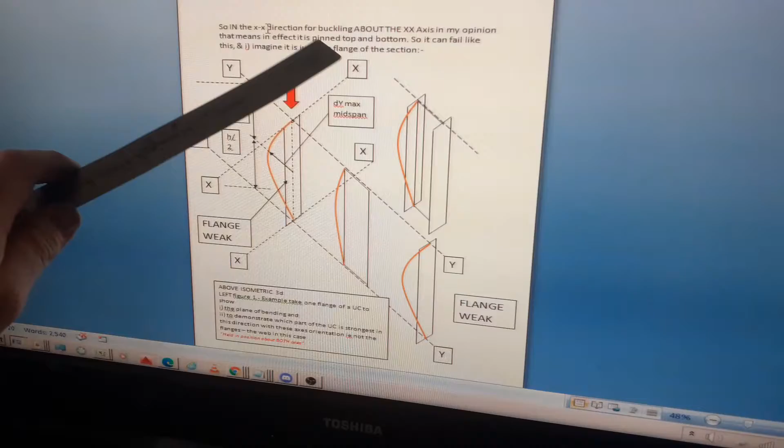So it's effectively held in direction in the XX axis. So in the XX direction, for buckling about the XX axis, in my opinion, that means it is pinned top and bottom. So it can fail like this.

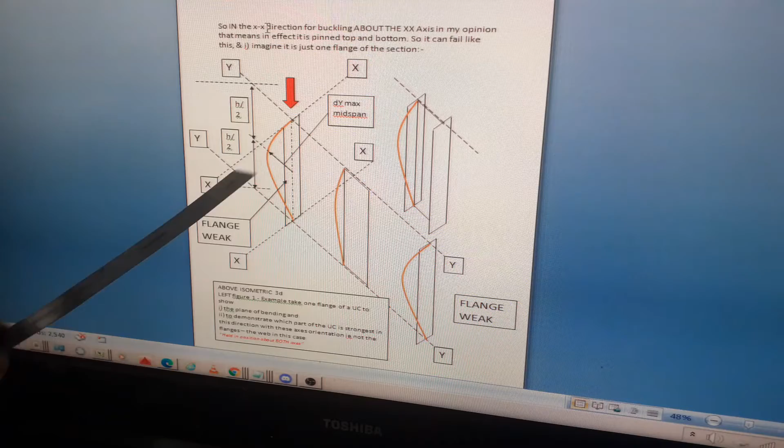Here's a little diagram. We're looking at XX, which I've drawn like that. This is the beam. I've drawn it like an I-beam, but it's actually more like an H, isn't it? 203 by 203 times 52.

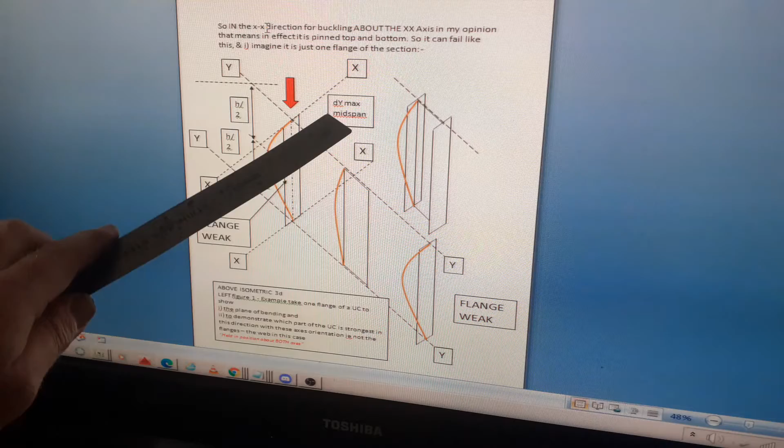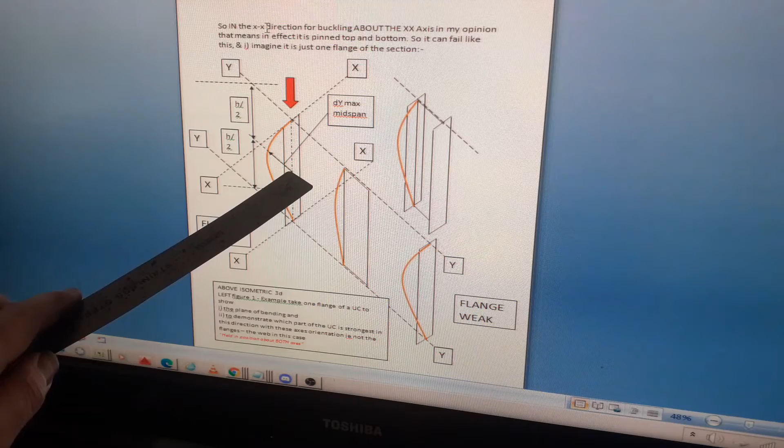It will buckle about this axis. As I've done another diagram below, if it buckles about the XX axis, I found it easier to think of it as all the deflection taking place on the y axis, at 90 degrees to the XX axis. Just think of it like that. So if it buckles about XX, that means it deflects about y, at 90 degrees. So like this.

So I can do it with a ruler, and here's a chance to look at how good things are at resisting buckling, because this is a column, right? You've got flange, web, flange, and I've separated those into three parts. We're talking about buckling against the XX axis.

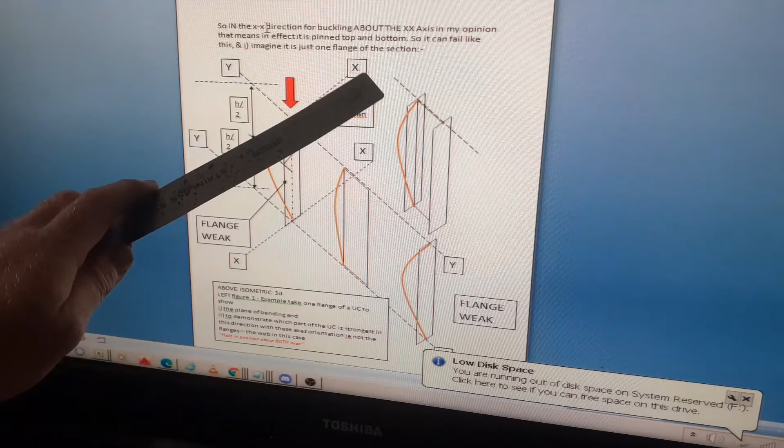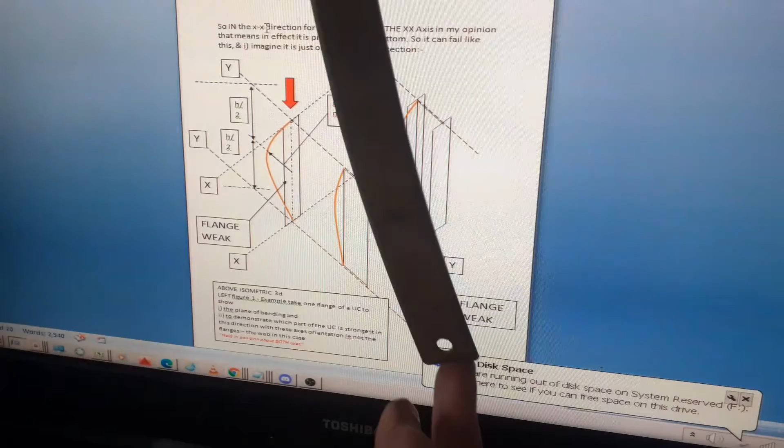If you look at the flanges, they are parallel to the axis of buckling, so that means when you do this, it's easy, it's going to buckle. It's weak because BD cubed about that axis is the least, so it has very low moment of inertia about that axis.

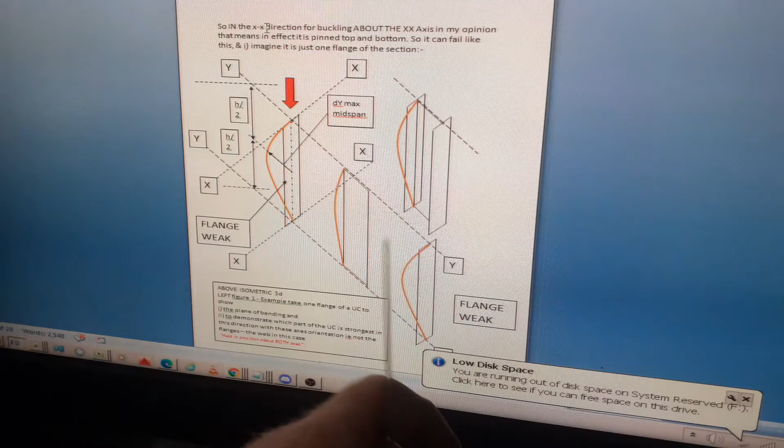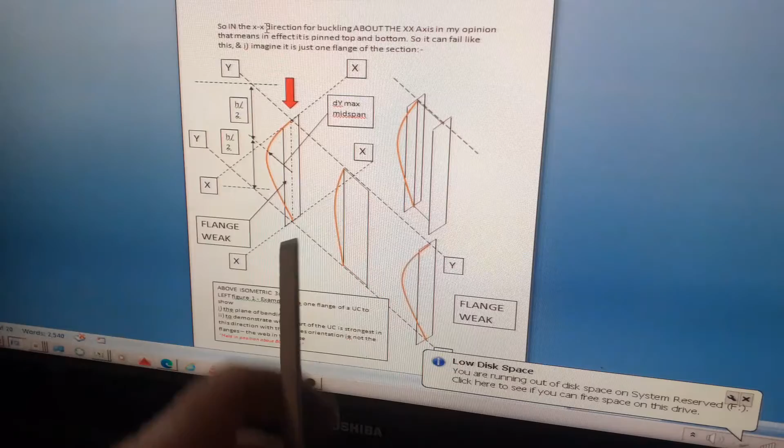So it just bends. The flanges for this section, the way it's orientated about XX, are going to be weak. The thing that's going to do all the work is the x-axis, because if you turn this at 90 degrees, I try and buckle it and I can't. It won't buckle about the other direction, because the BD cubed is much bigger.

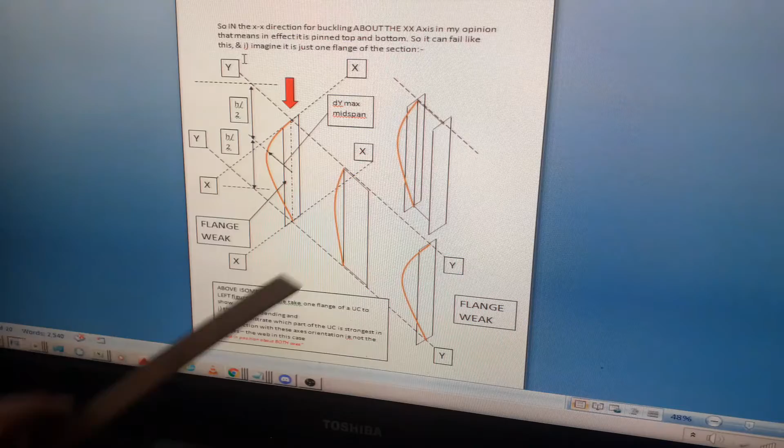The other thing to think about was the maximum deflection, which if everything's symmetrical, should take place at h/2. Here's the axial load; the maximum deflection will take place at midspan. So the above isometric 3D, that's an example

of how the column will buckle, to show the orientation of when it says buckling about XX, that means maximum deflection along the y axis. So the plane of the bending, that's what I'm talking about, the planes of the bending.

And to demonstrate which part of the UC is strongest, the flanges are weak about XX, but the web is very strong about XX.

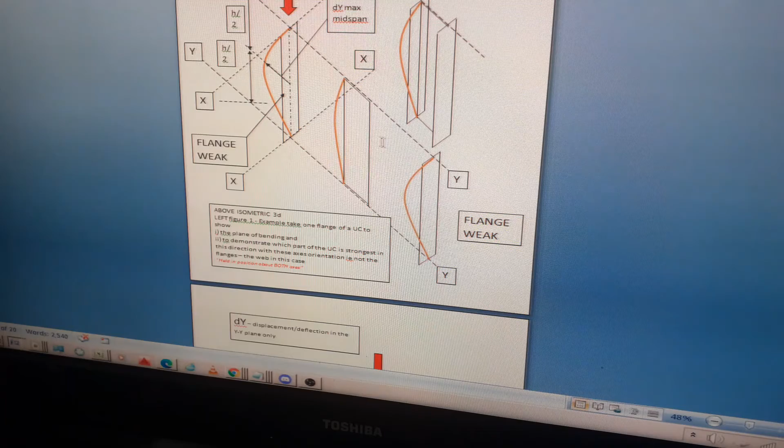So then I've done here, so there's that diagram, that's an isometric, and then I've done this diagram. This is dy, displacement deflection in the Y-Y plane. So I've done a cross section basically. All I was trying to show is again how it buckles.

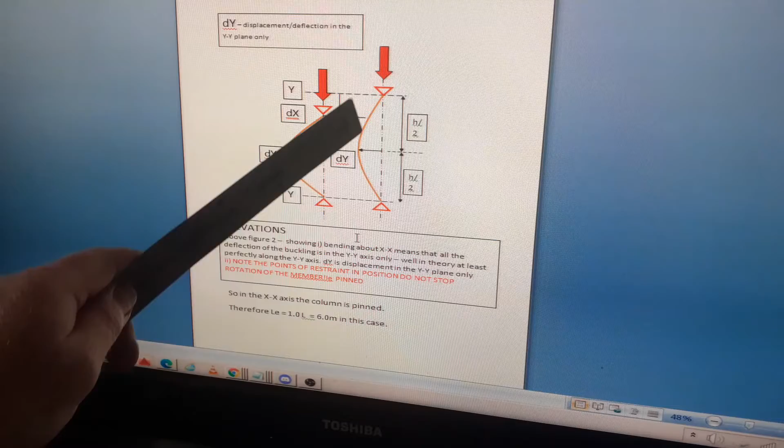So basically this is dy, along the x-axis coming in out of the page. Dy is the maximum deflection. So go back to the ruler again. It just bends like this, with the maximum deflection of dy at h/2.

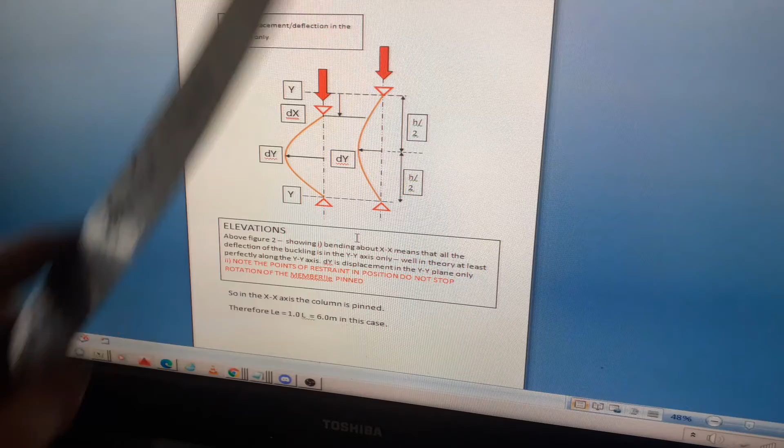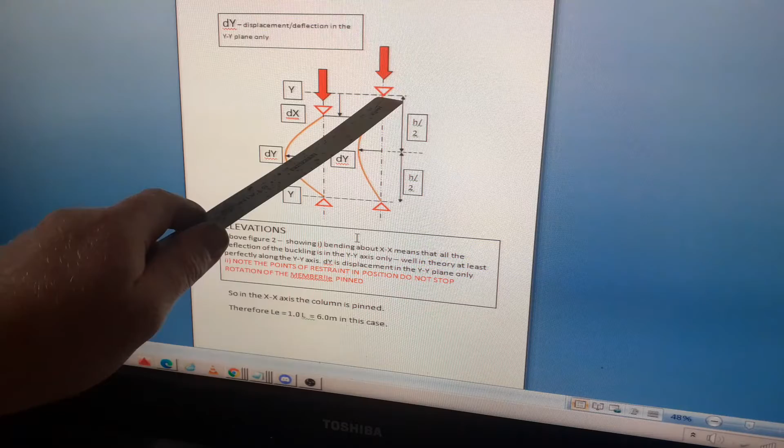So the other most important thing to say was, when it says held in position, for me that just means it's pinned. It's held in position, but the column can't move in any direction. The top of the column can rotate basically like that. So it will just buckle between those 2 points.

Therefore, for held in position but not restrained in direction in the x-axis, LE equals 1 times L. So that's 6 meters. So LEX is 6 meters.

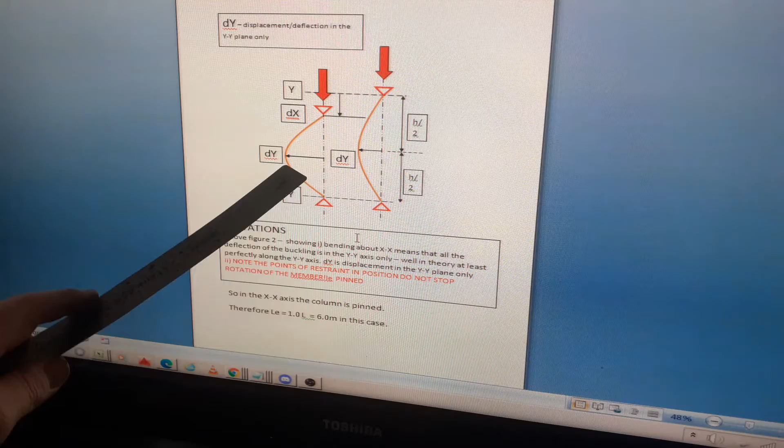I just did a bit more drawing here. That wasn't actually necessary, so that is the answer to the question, but I did a little bit more. I was trying to think about it like on the right hand side, this is the elastic deflection, and then this would be like failure, then it would go into plastic deformation when the column just buckles totally.

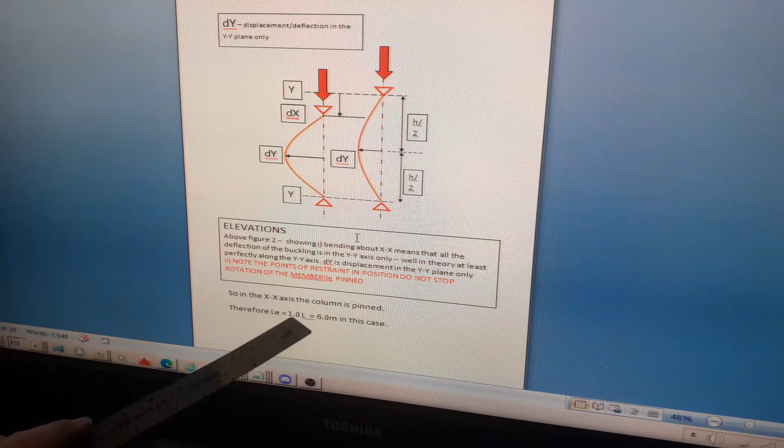But that's for another video. In this case, LE equals 1 times L, which is 6 meters.

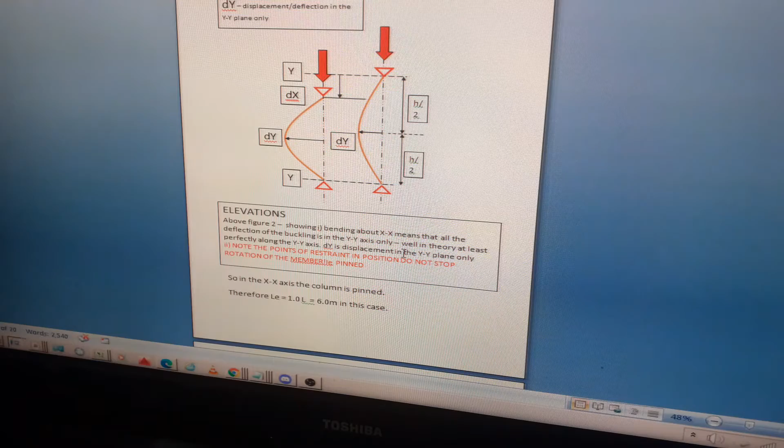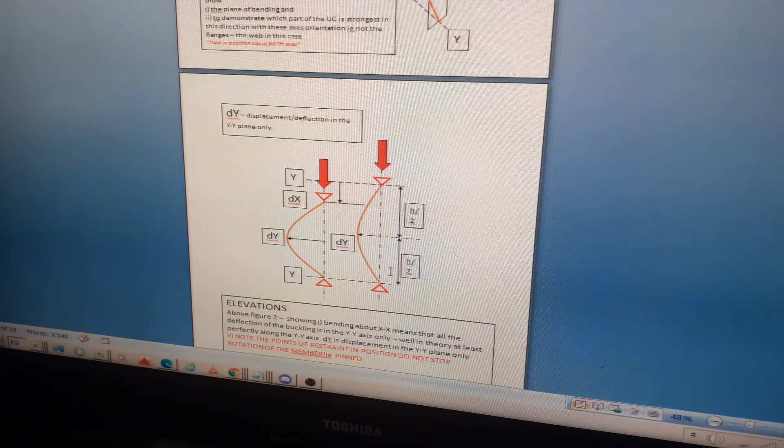So I'm just going to do the buckling about the Y axis in a separate video, but hopefully I've covered the main points. The main point was when it says held in position, for me that just means it's pinned. When it's pinned, LE equals 1, so LE equals 6 meters. So that's half of the marks for this question.

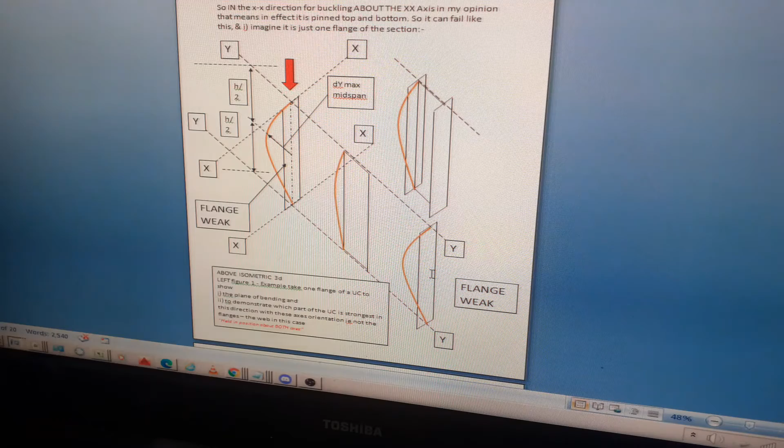And then as you just saw, I tried to explain the planes of buckling so people could understand. When it says buckling about XX, that means deflection is in Y. And then I did break the column section into 3 parts so you can see which parts are strongest about this axis.

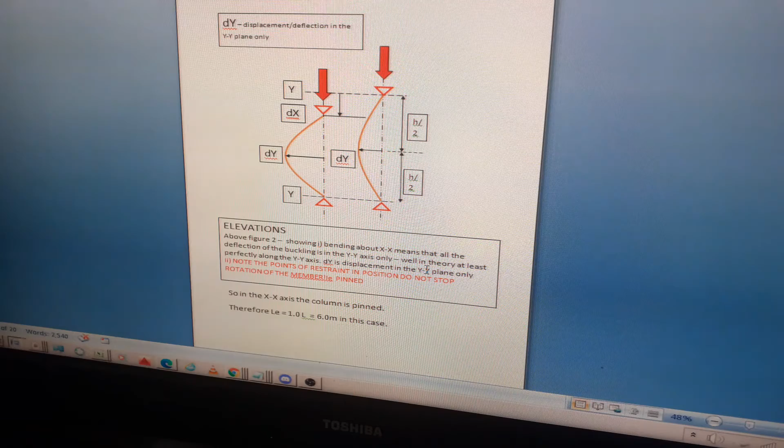So in the next video I'll show you, it's getting a bit long now, this video, and it's easier for people to say if they want to do XX and then look at the next video for YY. So in the XX axis the column is pinned.